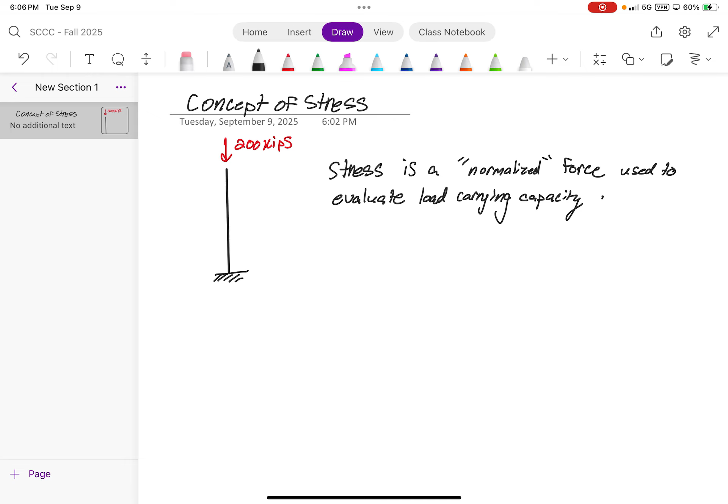We don't, right? So stress is a normalized unit of force. That's not English. And it's used to evaluate load carrying capacity of members of different sizes.

Let's take, for example, a concrete beam, or no, concrete column. What do you guys think is going to be able to handle more load? A 12-inch by 12-inch column or an 18 by 18-inch column? 18 by 18. Why? It's bigger, it's larger.

Now, you guys know how concrete is defined by a type of compressive strength, like you guys might have learned from... what is that course that Simon teaches? What? No, it's like the very beginning - construction methods. You guys learned about how concrete can have different strengths. For example, 4,000 psi concrete, 5,000 psi concrete. What does that mean?

Exactly. It's the pressure that it can handle, or the force that it can handle per unit area.

So now let me ask this. Let's say that 12-inch by 12-inch column was 8,000 psi concrete. But the 18 by 18 was 4,000 psi concrete. What can handle more load now?

That's what my small... Well, how do you know? Because we need to take more load bearing. Yeah, but the 18 by 18 has a larger area. So you need to do the math in order to determine it. But this gives us an idea.

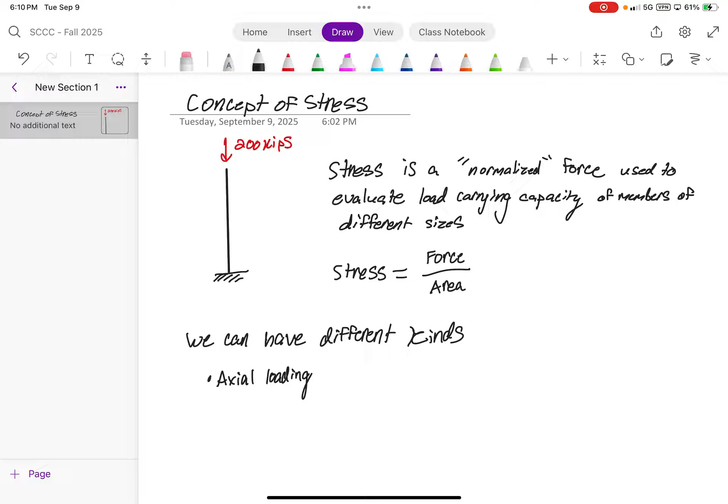So in the case of a column being loaded like this, we would call this axial loading, or axial stresses. And what this basically just refers to is simple tension and compression.

We can also have shear stresses. Who here knows what shearing is? Anyone? Anyone want to take a crack at it? Everyone's heard of the term shear, but what is it? It's sliding. Yeah, they're sliding stresses.

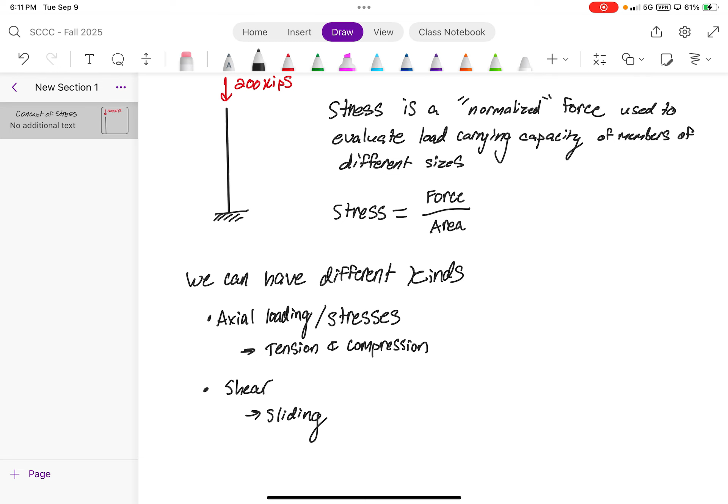We'll actually learn about shear stresses next class. We can also have bearing stresses.

What type of structure do you think might transfer bearing stresses? Girders? Yes and no, it depends on how it's ultimately connected. I'd say a perfect example of this would be footings, where there's a straight contact area in which something's pushing down on. So I'm going to put footings, for example.

We can have bending stresses. What type of structures do you think undergo bending stresses? Bridges, yeah. But bridges can take, what part of a bridge specifically though? Because bridges can take pretty much every single type of these. It's just a structure - the particular elements themselves each carry their own particular loads, which then transfer it through stresses.

So what part of the bridge might handle bending stresses? Just the road itself. Right, the road, the beams. So these would be like beams.

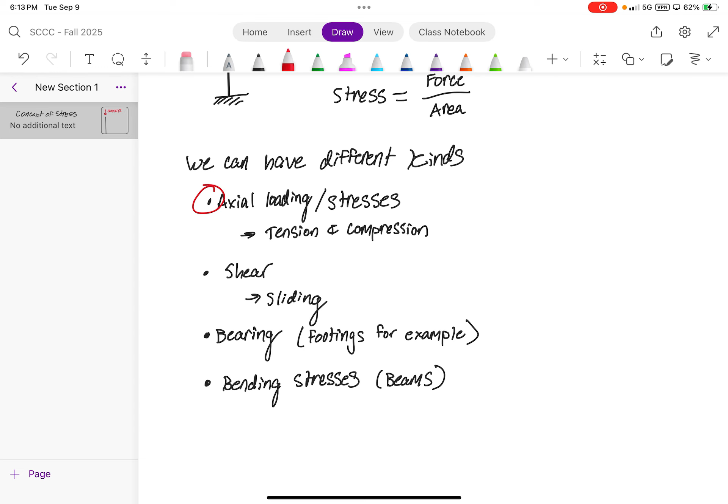So let's consider an example. Let's say we've got a beam here. But instead of it being like a beam, it's just some horizontal element, and it's subjected to some load. Somebody pick the magnitude of the force. How large do you guys want this to be? 10 kips? All right.

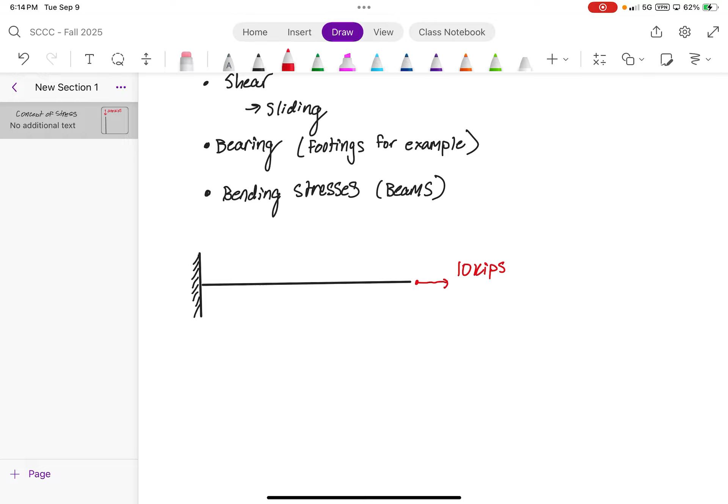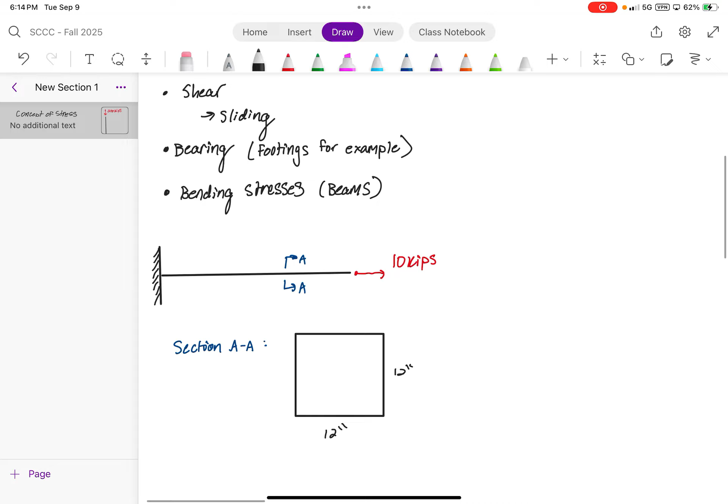Great, now let's pick some geometric properties about it. Let's say that when we look at this from a cross-sectional perspective, so looking at it from section AA, it's rectangular in cross-section, and it's 12 inches by 12 inches. All right? Now let's determine the stress.

But right before we do that, let's just define really quickly some of these variables. Stress we commonly refer to as this Greek letter - it's basically a zero with a hat. My students last semester got really creative and did not call them the appropriate names. So this term is called sigma. The force is just going to equal F, and then the area is just A.

All right, so if we wanted to calculate the stress in this member, how would we do that? We've got 10 kips, and then 144 square inches, because the area is 12 by 12, so 12 times 12 is 144. What do we get for the stress? We get 0.07, and we'll use units of KSI.

This represents some... whoops, that's way too large.

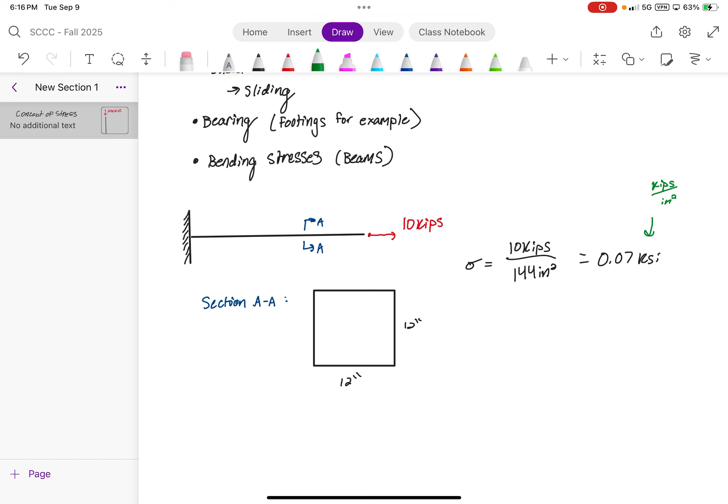Kips per inch squared. Do the units look familiar at all? KSI, we could convert this to PSI, right? How do we do that? How many pounds are in a kip? 1,000 pounds in a kip. So if we were to convert this to PSI, just multiply it by 1,000. And you would get, I did some rounding off, but the actual value would be like 69.4 PSI, which rounds up to about 70 PSI. So it's a very small stress.

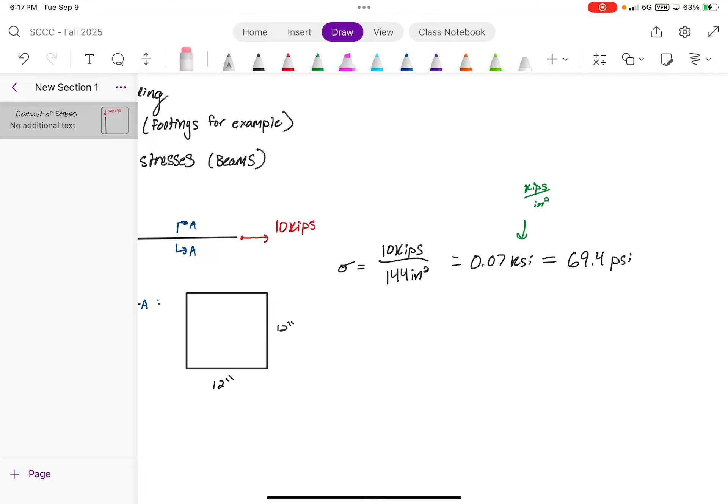We can also convert this to units of PSF. How many square feet are in a square inch? Well, here's a nice little trick. If we wanted to convert it to PSF, multiply it by 12 inches squared per foot squared. So multiply it by 12 inches per foot, and then just square the whole thing. What you'll notice is the inches will cancel out. And what we would get for stress at this point now is 10,000 pounds per square foot.

Let me increase the size of this slightly. So let me ask you this. Which stress is the correct stress? You want to take a crack at it? I guess it would be all of them, right? Yeah, exactly. They're all the same in terms of units. But this is where it's really important to pay attention to units. Because if you write down that it's 10 kips per square inch and you're designing something for 10 kips per square foot, there's going to be a big issue because you're not paying attention to your units.

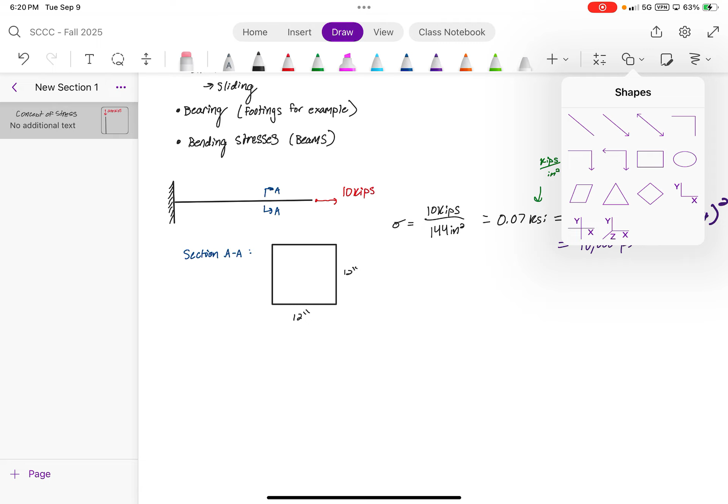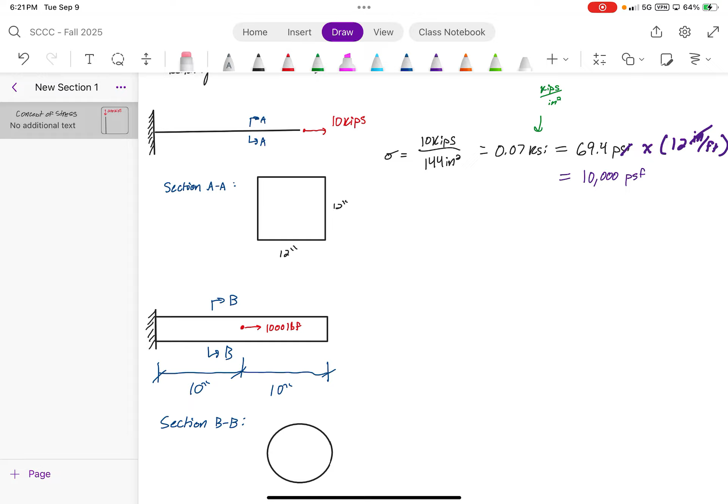All right, now let's get into this a little bit further. Let's say now we've got... I'm going to get a little artistic with my drawings. I apologize if they take me a little bit of time to draw, but I promise they'll be worth it. Let's say now we've got a member loaded right here, and let's say it's about 1,000 pounds. And it's located ten inches away. And its cross section, I'm going to use BB actually, is now just circular, and it has a diameter of, let's say, 3 inches.

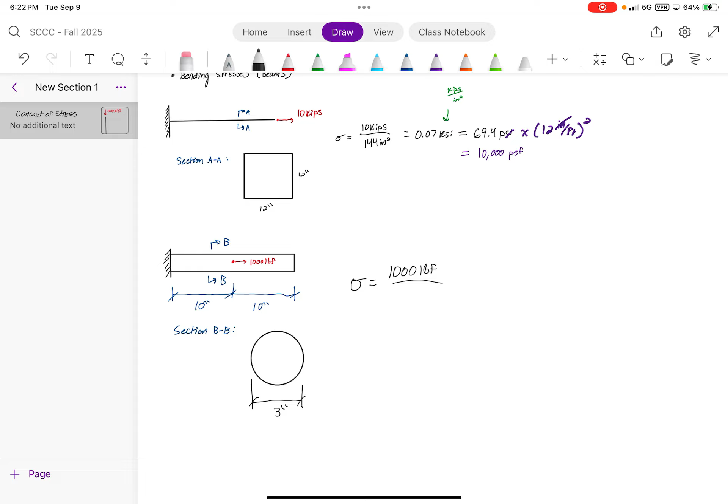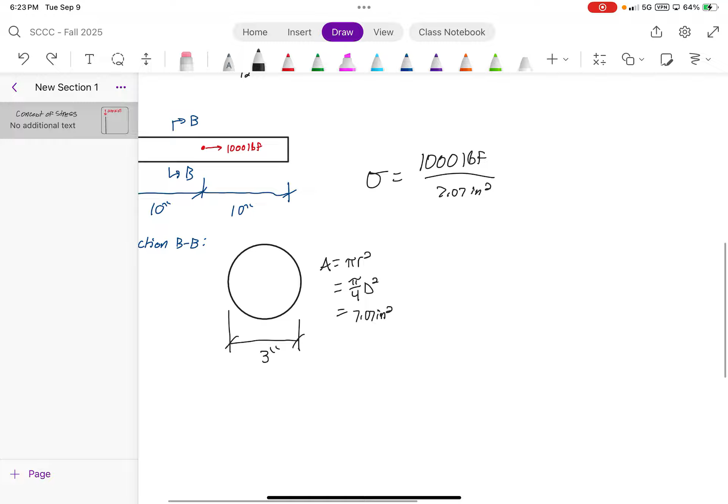What would the stress be in this case? How about you guys give it a quick crack at what the stress would be? So 1,000 pound force divided by what? What's the area going to be? What's the area of a circle? Pi r squared. You can rewrite this in terms of diameter, this is my preferred form: pi over 4 times d squared. When you calculate this, you're going to get roughly 7.07 inches squared. So when you throw this in there, you should get that the stress is equal to 141.5 psi.

Now, here's an important question. Is that entire rod stressed? Is every part of this rod going to feel this 1,000 pound force? What do you guys think? Raise your hand if you think yes. You think every part is loaded. You do. Who else? Who here says no? 1, 2, 3, 4, 5, 6. Who here doesn't give a crap?

Does anyone happen to have a rubber band by any chance? You do? Who does? Nicole has a rubber band? Do you mind if I borrow it? Oh wait, here's one right here. All right, I'm going to stand really close in the middle, so I hold both ends and I load it, right? Both sides stretch, right? Makes sense that the entire thing is fully under load, right? Now let's say I grab it at midpoint here and then I pull it. What about this part here that's a little floppy? Is that under any loading? It's unstressed. So in cases like this, it's really important to understand where loading is really occurring. So the stress is really only being felt in this region of the rod here, and everything else is just freely translating because of this deformation.

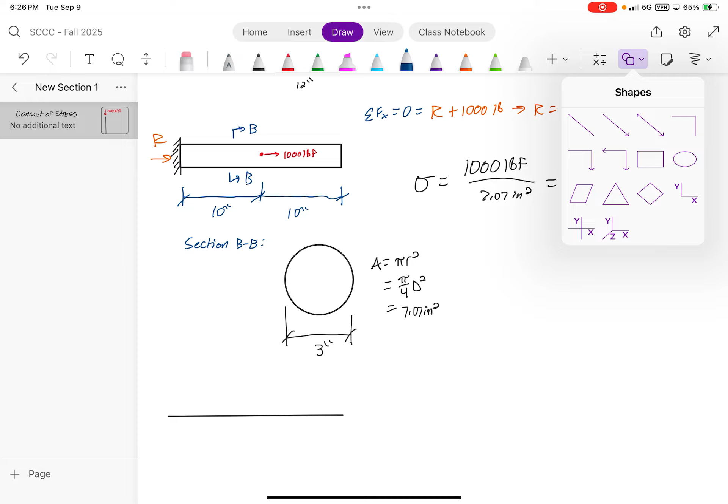Now, to get these diagrams, we need to observe how the forces look internally, because stress is dependent on what the internal forces are. Do you guys remember when you were dealing with trusses, you would do this thing called the method of sections, which you would cut into the members and analyze the forces internally? You do the same exact thing here.

So let's say we cut just an arbitrary section just right through there. Let me draw that down here.

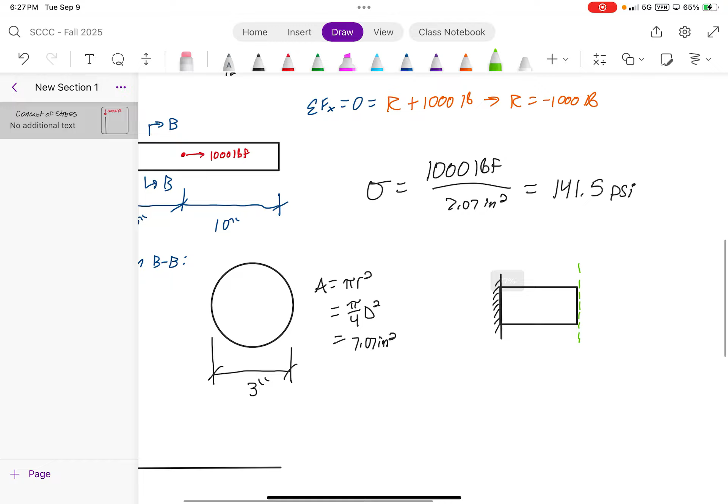And then what was the rule with method of sections? You observe everything either to the left or to the right of the section that we're interested in, right? So in this case, our section is just going to be just like that, with the green line coming down like that. Next, we draw our forces that are applied, which in this case is just going to be 1,000 pounds acting to the left. You guys see that so far?

And the last thing that we do is we replace whatever material is remaining with our internal force, which I like to use the letter N for internal forces. So that would then in turn change this to N.

So we look at forces in the x direction equals 0. And what's our equation going to be? It's going to be negative 1,000 pounds plus N. And N, you get positive 1,000 pounds.

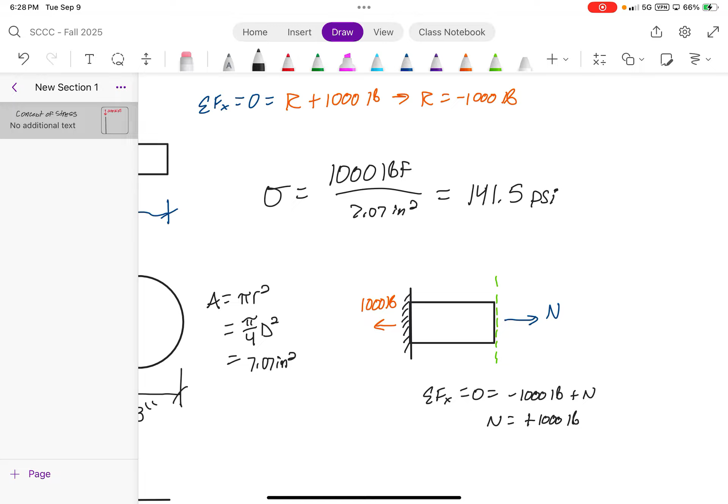What does the positive indicate within the member? What do you guys remember from method of sections for trusses? What does a positive sign indicate? Tension. So our rod is in tension, which makes sense because this load here is just pulling it out, right? Like this would get ripped right out of the wall if it was not bonded properly. You guys would agree, right?

I know it seems very easy right now, but once I throw 4 or 5 loads of different magnitudes, this thing gets complicated really quickly. And then you can't tell what part of what rod is under compression, which one's under tension. Which is why I'm telling you, just cut sections whenever you can, because it helps big time with understanding what the internal forces in each part of the rod are.

Now, just for clarity's sake, let's cut a blue section right there. What our shape is going to then look like is it's just going to be a little bit longer. Our force is going to be 1,000 pounds. Let's draw the blue here.

And then we include everything either to the left or to the right of the section. So in this case, we're going to have this 1,000 pound force added back. And then of course, we always add N.

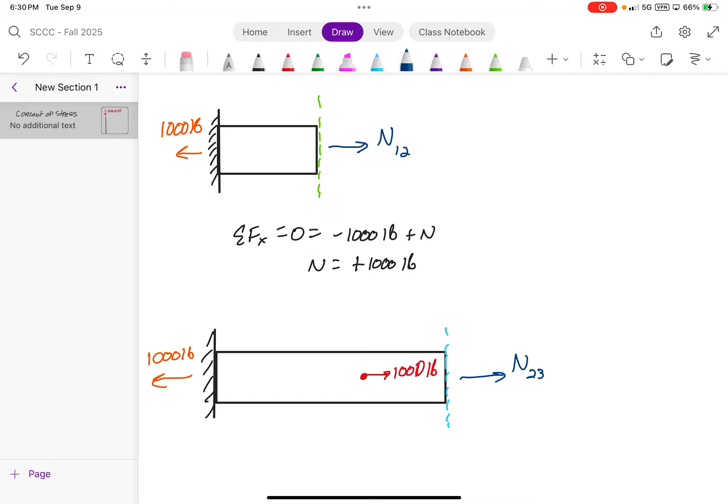What is N23 going to be?

All right, let's see if I can remember people's names. I know you're Michael, right? You're Grace? No, what's your name? Olivia? Yes, Olivia. There's not even a Grace in this class. You're Nicole. I cheated a little bit because somebody said your name. What's your name? Ella. I don't think you were here last class, right? What's your name? Alejandro. You're Michael, I just said that. I cannot remember your name, I'm so sorry. What is it? Emily. I'm really bad with names, so I'm sorry. What's your name? Tom, or Thomas? Your name? Joe? No, Christian. Isaac. What is it? Isaac. And then Edgar. All right.

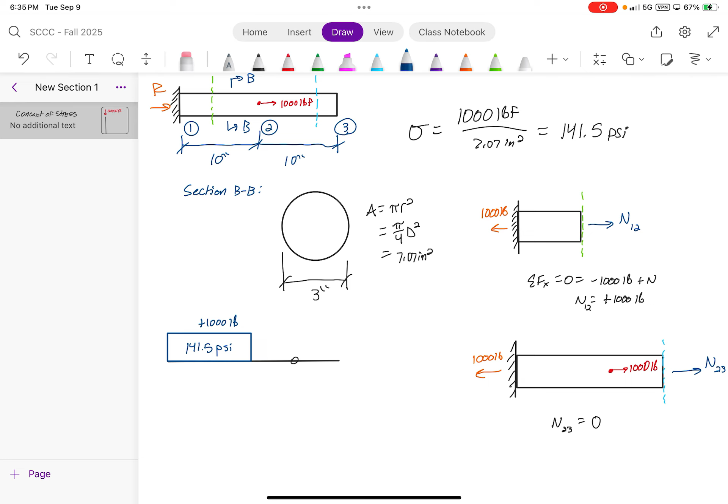And then this in turn, once you divide it by the area, would be 141.5 psi. You guys agree? How'd you figure out 141.5? That comes from the stress that we computed up here.

And so then, of course, this stress here, this force is not exactly the 1,000-pound force applied, but it's actually the internal force. So always use the internal force, because once you start seeing like 5 or 6 loads, then the stresses are dependent on how each load independently is affecting that section of material. Make sense?

All right. I got a nice fun one now.

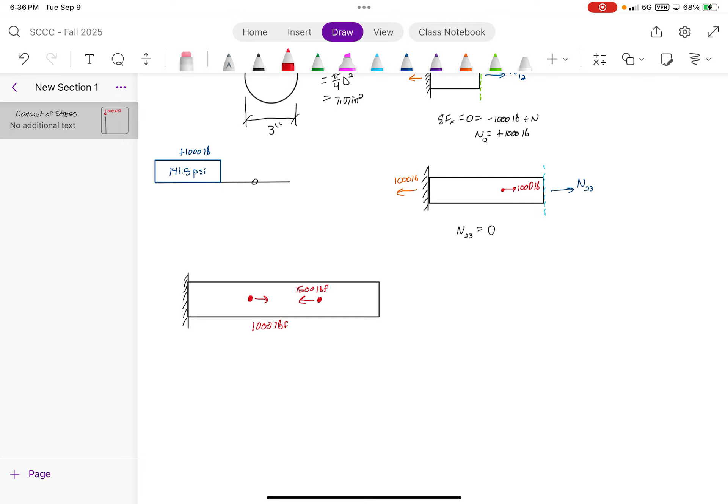Let's say now I've got a rod here. A 1,000-pound force - that's still 1,000 pounds, don't worry, I'm just... a 1,500-pound force, and then a 500-pound force.

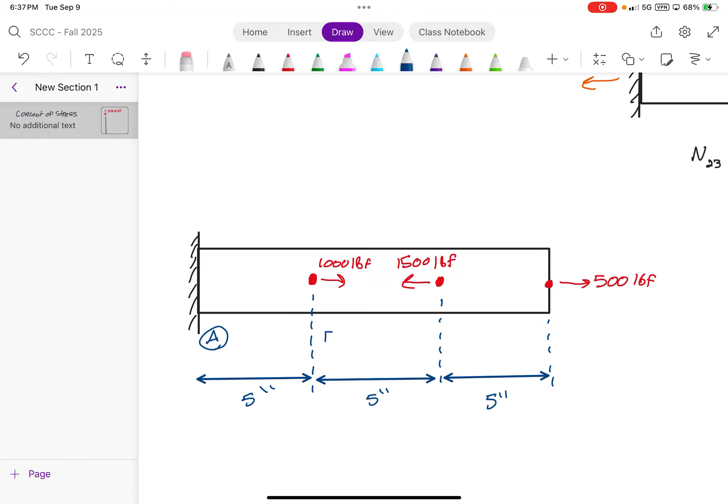And let's say that the location of each of these is just a third of the total length. So this will be like 5 inches, 5 inches, 5 inches. We'll call this point A, point B, point C, and point D. And what we want to determine is the stresses in AB, BC, CD. You guys agree there's 3 separate parts of this bar, right?

How do you guys think we would determine the stresses? Or the forces, better yet. The first step we would always take is just determine external equilibrium. This is your sum of the forces, sum of the moments. It's your statics.

So what we're going to have now is our reaction force, RA. And what would the sum of the forces in the x direction equal? Let's say we want to determine RA. What would that be?

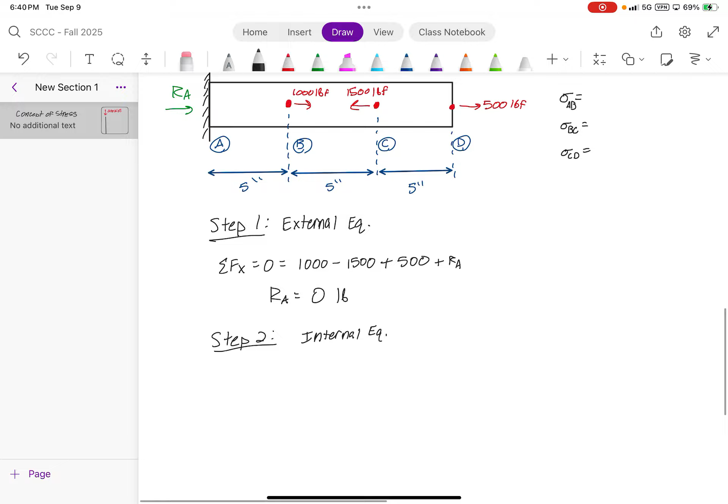All right. Step 2, now we look at internal equilibrium. And this is the step where you start cutting into sections. So how many sections are we going to want to cut here?

3. My recommendation is just always cut them right down the middle of each. So we're going to have section 1, section 2, and section 3. Always including everything to either the left or to the right of said section. So looking at section 1, what are we going to have?

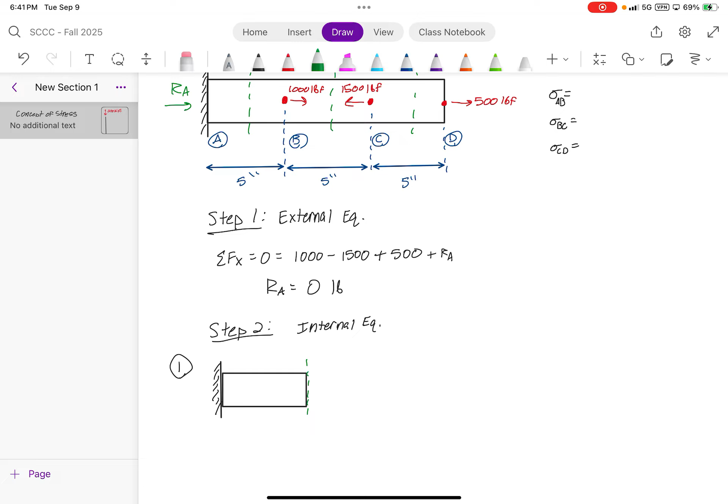It's just going to be this rectangular section right here. And then we would generally draw RA, but we know that that's 0. And we're going to have our internal force NAB this time, because of the points it's between, NAB. You can also, if you wanted to, say it's N1. Doesn't matter. You could say it's either the stress between the points A and B, or the stress at section cut 1. Doesn't really matter too much how you call it, just as long as it's correct.

So, what's the stress in that region of rod? Or the force?

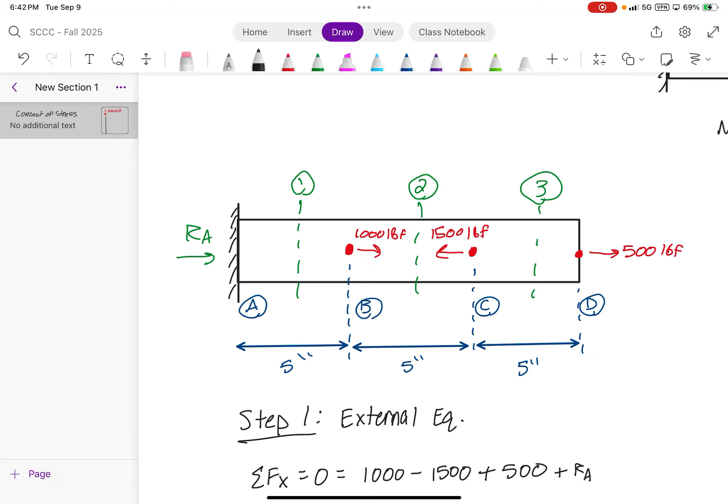So, simply put, the force in member AB, or part AB, is just 0.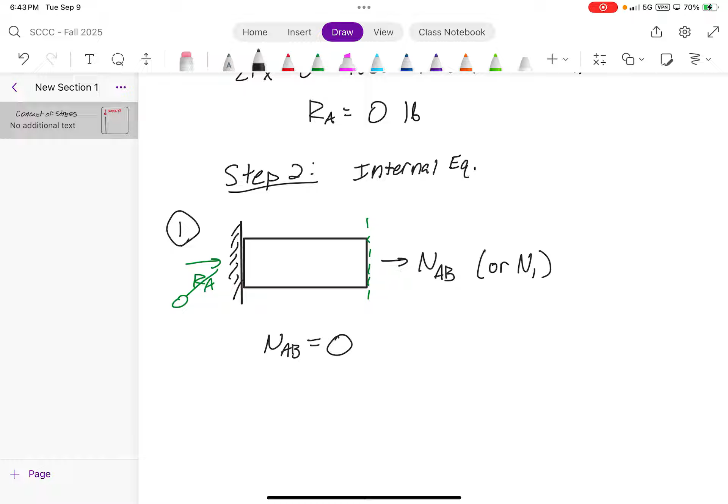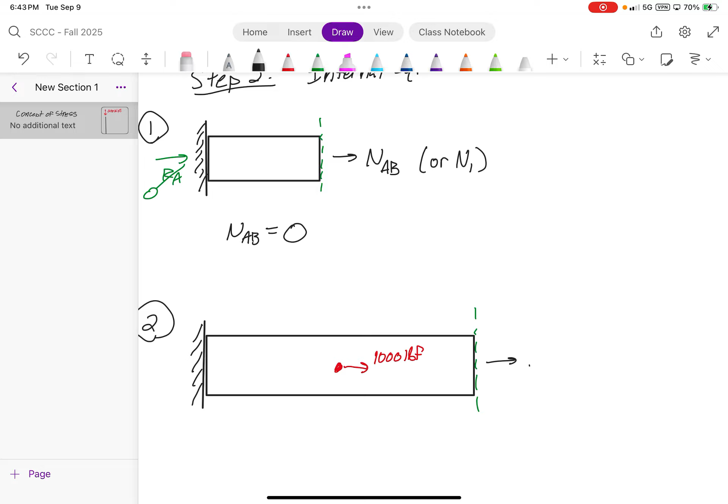Let's look at section 2 now. Our force here is going to be a 1,000-pound force moving to the right. And now we draw NBC, or N2.

What's that tell us about member BC? Keep in mind, you guys notice the direction that I'm drawing the forces? It's always away from the cut section, indicating it's assuming tension. So we're assuming that the internal force here is in tension. How do we determine its magnitude?

What do you guys think, Emily? It would be, if sum of F in x equals 0. Yeah, just apply your statics, it's internal this time. So you do sum of the forces in the x direction, set that equal to 0. And what's that equation going to look like?

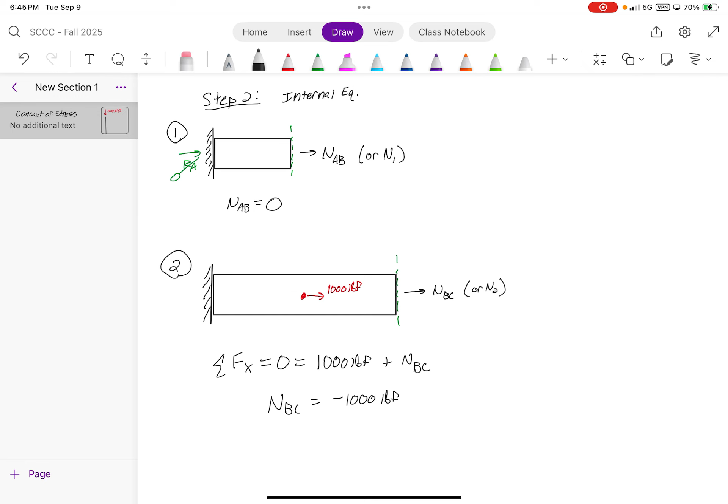1,000 plus NBC - so we've got a 1,000-pound force plus NBC. And what's NBC going to be? Negative 1,000. What does the negative sign indicate? Compression. Who said tension? Oh, I did. Okay, so it's a 1,000-pound force in compression.

Last step, look at section cut 3. It's kind of long, I know. And then our internal force NCD, or N3 - that should be an arrow.

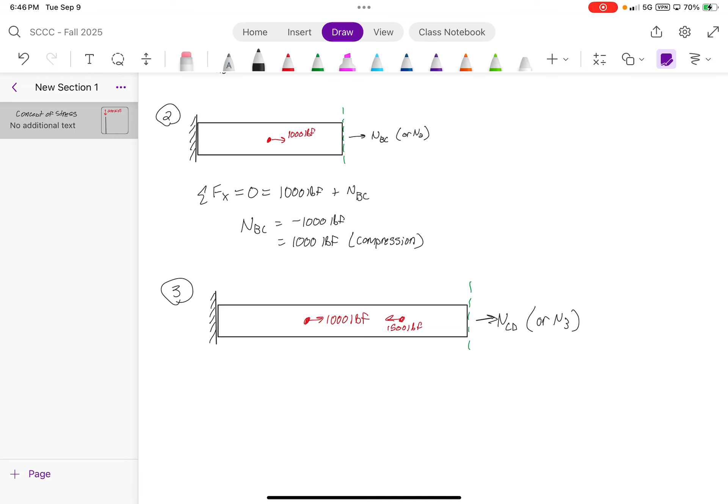What's NCD going to be now? Michael - so you would do, wouldn't we just do the same thing as the last one? Yeah, which is the sum of force in x? What's that equation going to look like? It would be 1,000 plus negative 1,500 plus NCD. What do we get for NCD?

Did you say negative 500? No, it's positive 500. Carry the 500 over. That's going to be in tension.

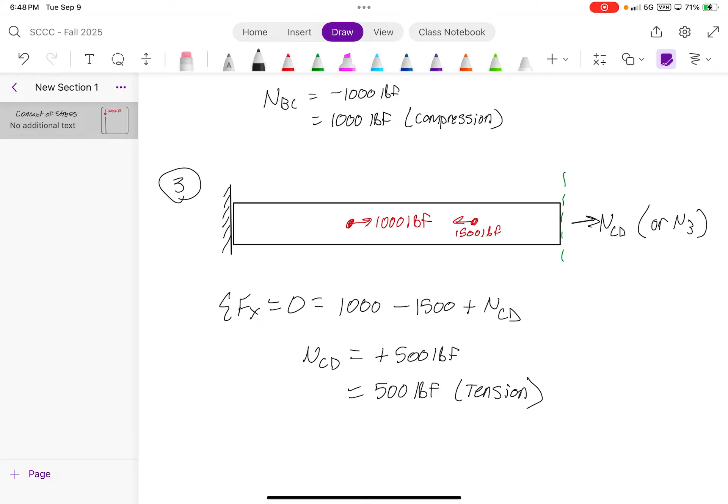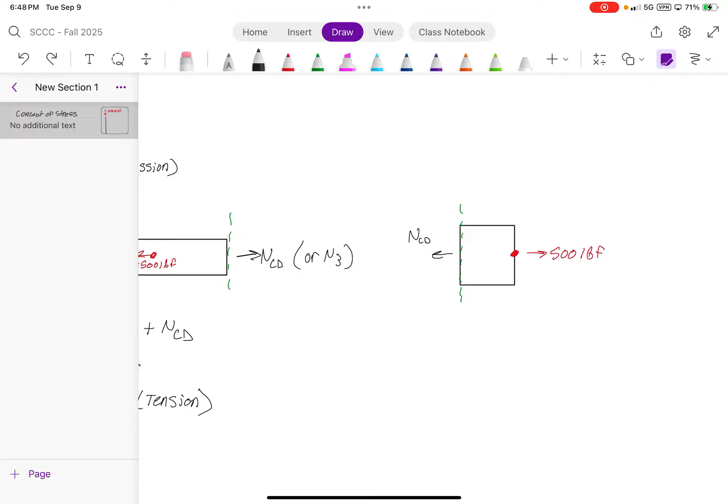Another way you could have done this is to look at the section from the exact opposite way - I'll show an example. Here it would be a 500-pound force, our section here, and the internal force again assuming tension. What you find from forces in the x direction is negative NCD plus 500. NCD is 500 pounds in tension. So you see that as long as you're doing your steps correctly, it doesn't matter which side you take the section from - as long as everything up to this point is correct, your math should work out. 500 pounds and 500 pounds, they should match.

Make sense so far? Sweet.

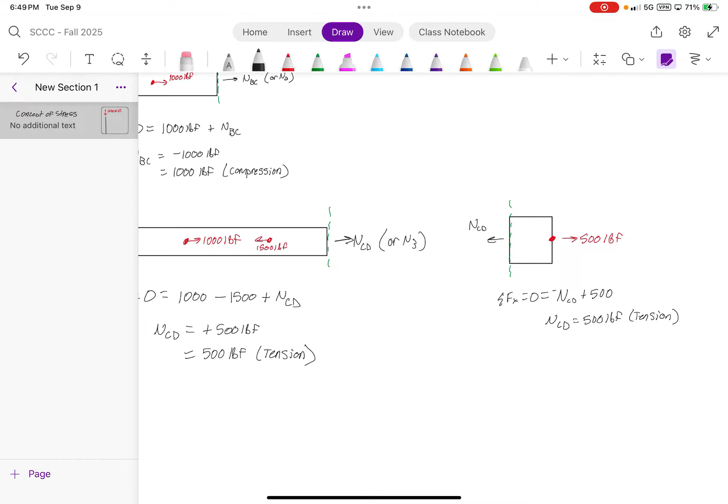So now we go over to draw our internal force diagrams. I'm just going to mark this out really quickly - we've got point A, point B, point C, and then point D. What is the magnitude of the force in member AB? 0, so we could just put a little 0 right there.

What about the magnitude of the force in member BC? 1,000 - compression or tension? Compression. So make sure you add a little negative sign. I usually like drawing it in red.

And then CD is what? Positive 500 in tension, right? So you just draw that little diagram here - I'm trying to do it to scale. Positive 500-pound force. And that's how that member is really loaded.

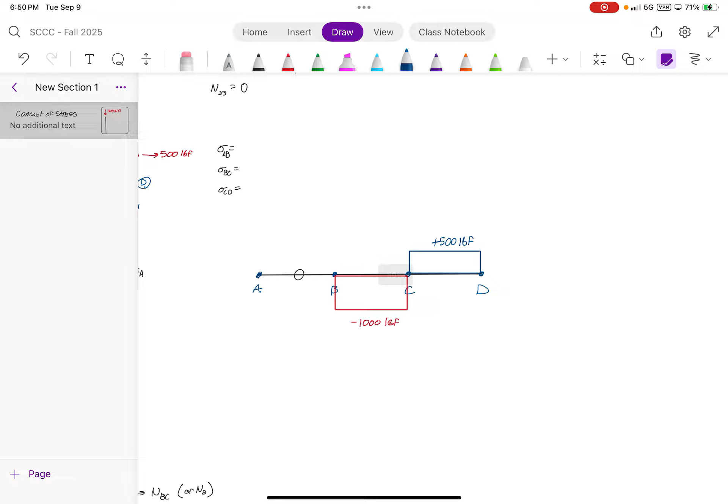You notice there's a 1,500-pound applied force, but really with the contribution of all the forces, we only need to really design for an internal force of 1,000 pounds.

Now you understand how the loads kind of transfer down in a building, right? The columns can actually be a lot smaller towards the top of the building because there's a lot less load. So instead of it being left and right, you're stacking downward force by downward force by downward force. And you can draw these diagrams for buildings accordingly. Make sense? Sweet.

All right, let's complicate things even more now. Let's say - let me actually ask this.

Does anyone have any questions so far about anything that I just covered? Nobody? No questions at all? I just want to make sure everyone's fully understanding it before I start throwing more stuff at it. All good? Cool, coolio.

Let's say now we have a rod, but it's a stepped rod. And we apply this force here, about 10 kips.

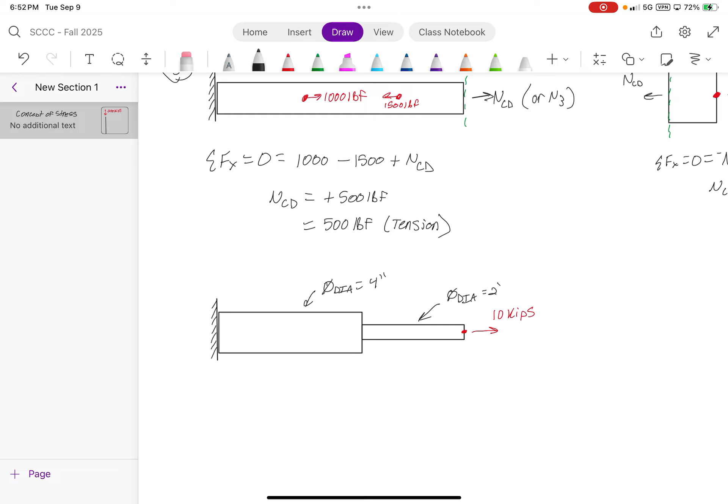Now let's say that this is a circular shaft with a diameter of around 4 inches, and then this is a shaft with a diameter of, let's say, 2 inches. I'll give you the lengths too: this is 10 inches, and this is 8 inches.

I just realized I never even gave you geometric properties for the previous problem, but that's fine. It's the same steps - you would just take each independent force and divide it by the area.

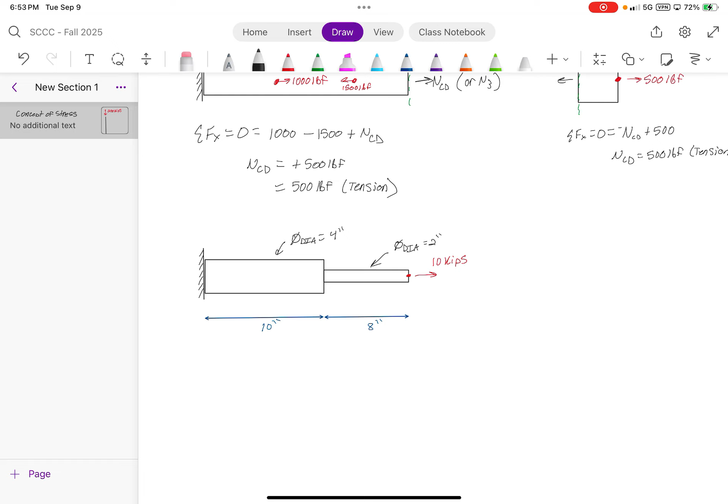Let's say we wanted to determine the stresses now for AB and BC. So that's AB and BC.

What's step 1 of this problem? Exactly. Step 1 is just external equilibrium.

What do we get for the reaction at A? You do sum of the forces in the x direction. We get RA plus 10 kips, indicating that RA is equal to negative 10 kips, or just 10 kips moving to the left.

Now, what's the internal force in member AB? Quick question - it's negative 10? You draw it assuming it's always moving to the right, and then mathematically, since this is moving to the right, this has to move to the left. So you get RA plus 10, this becomes negative 10, and the negative sign just indicates that the assumption you made about the direction is incorrect.

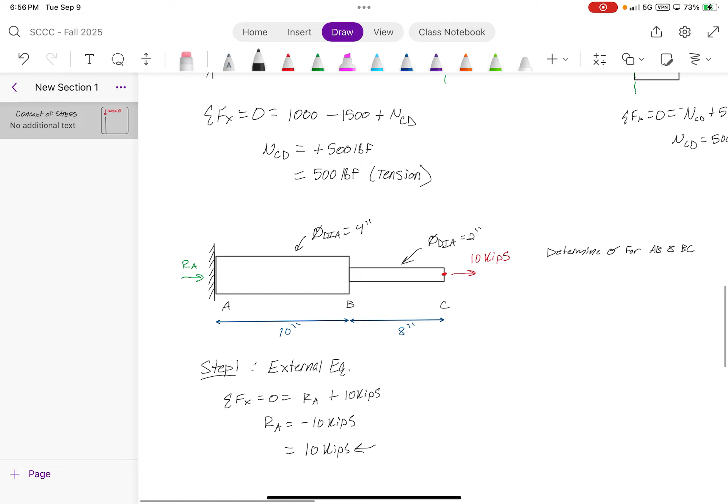So just from observation, when you go to step 2 and conduct internal equilibrium, you can just say all internal forces equal 10 kips. Now, that 10 kips - is that a tension or a compression force? Compression? Tension. It's a tension force. So it's 10 kips in tension.

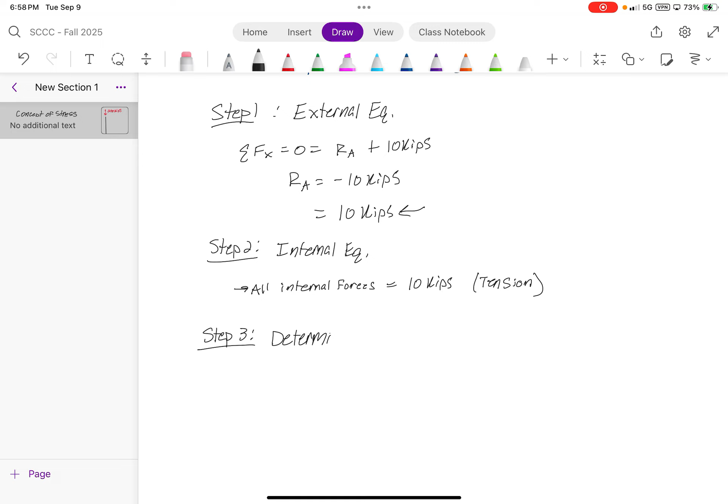Now, step 3 of the problem - we didn't do it for the previous problem, but we're going to do it for this one. Determine stresses. So we're going to have one for AB and one for BC.

What do we need to compute the stress? Remember our stress equation. I want somebody back here. But Michael, you get to pick one of the 3 back here. Please announce your name again. You're Joe, Christian, and Irving - what is it? Irving. So you get 3 options: Joe, Christian, or Irving. You get to ruin one of their afternoons or evenings. I'll just do Christian.

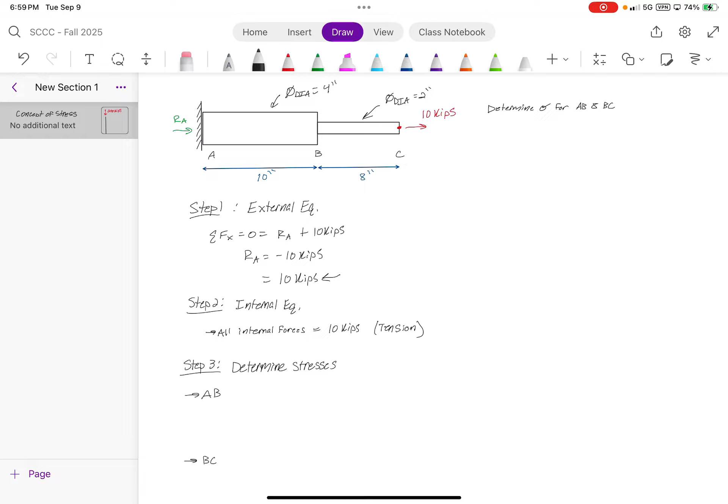What do we need to determine the stresses? Stress equation. And what does the stress equation tell us? Stress equals force over area. We have the force, so what else do we need? We need the area. How do we determine the area here? What are we given? Diameter. And what's the equation for using a diameter? The diameter indicates it's a circle, so what's the equation? Pi over 4 times d squared. Exactly.

So the area here is pi over 4 times the diameter, which is going to be 4 inches squared, which gives us an area of around 12.57 square inches.

Let's do it really quickly for BC. And the area is 3.14 inches squared.

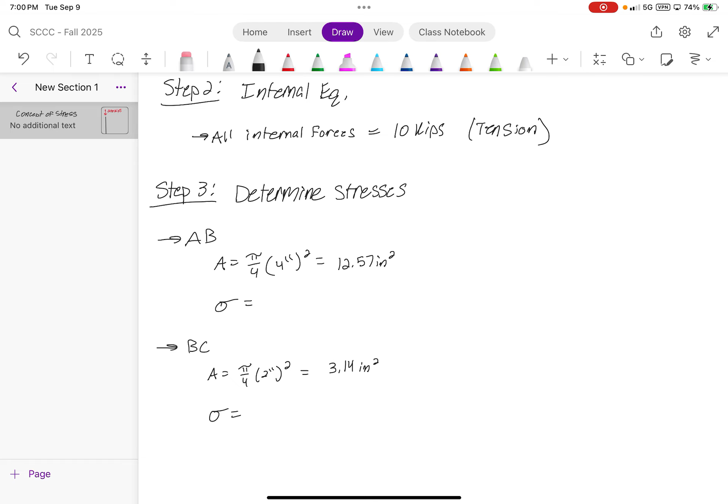The stress is just going to be 10 kips divided by 12.57 inches squared, and that gives us roughly 0.80 KSI. For the other shape, it's going to be 3.18 KSI, give or take.

What do you guys notice about the stresses? 3.18 and 0.80. How does that make sense? This is only twice the diameter, but the stress is 4 times the size.

What do you guys think? Is there a moment on it from RA? No moment, we didn't take any moments. What did you say? Say it. The value - yeah, but what about the value specifically?

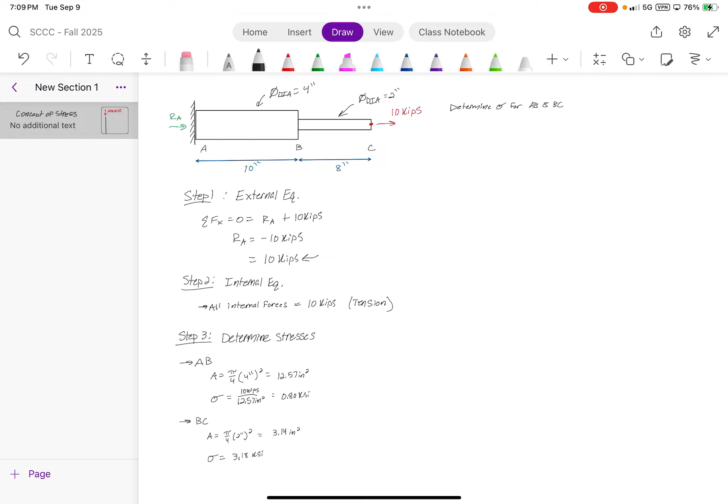Make sense? And for number 4, do you want us to find the inertia also? That's the centroid question, I believe so. What did the question say on the homework? Let me go back and look it up.

SCCC, semesters, fall 2025. Let me not pull up the solutions. Oh, that's homework 2. That's next.

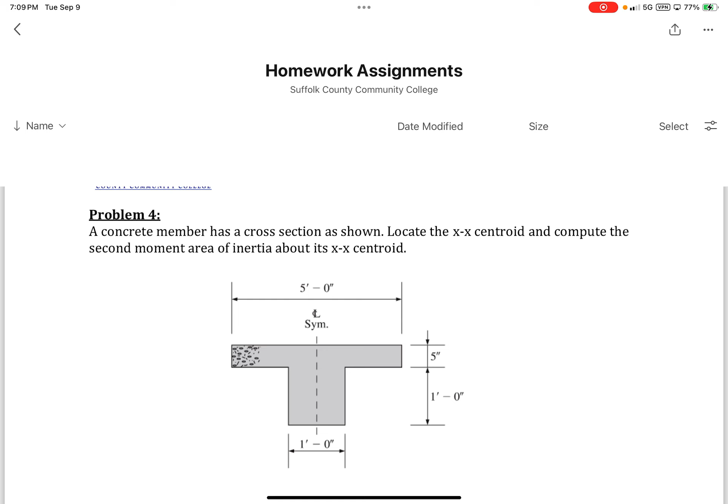Locate the XX centroid and compute the second moment of area, the I value. Is that I of X? Yeah, I specify the XX centroid, which is going to be wherever the neutral axis is. Where is this? Let me just check this really quickly.

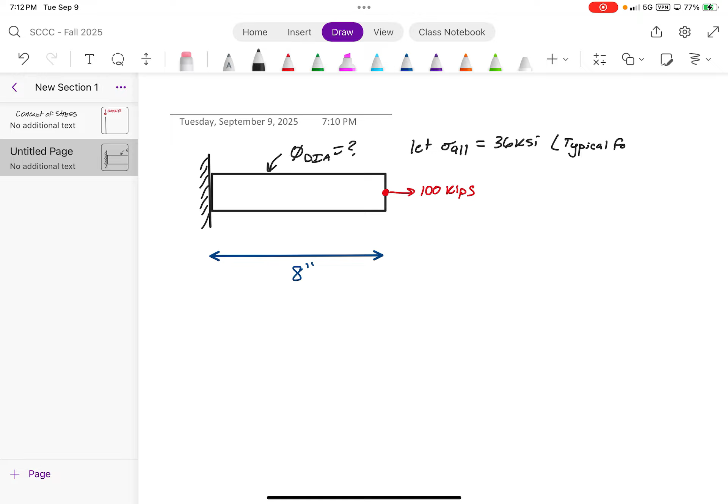I'll give you guys a little bit of a fun problem. I'm going to teach you guys a little bit about how to design stuff now. Since we learned how to analyze internal forces, we understand the concept of stresses, hopefully, right?

So this problem I'm giving you guys now, I give you guys an allowable stress of 36 kips per square inch. What this means is that it's a material property. This is a new concept to you guys also. 36 KSI, for your knowledge, is the typical yield strength, we call it, we'll get into it later on, for A36 steel, which is a type of steel that is heavily used in the construction industry. A lot of steel members, like steel channels, steel angles, are made from A36 steel, and its allowable stress is 36 KSI. So my question to you guys is, what is the diameter that we would need in order for it to not fail?

Let's round it to the nearest 16th of an inch, right? Because if you went to a fabricator and said, I need a steel member with a circular diameter of 2.84193678 inches, the contractor would more than likely smack you over the head with that steel member. Round it up.

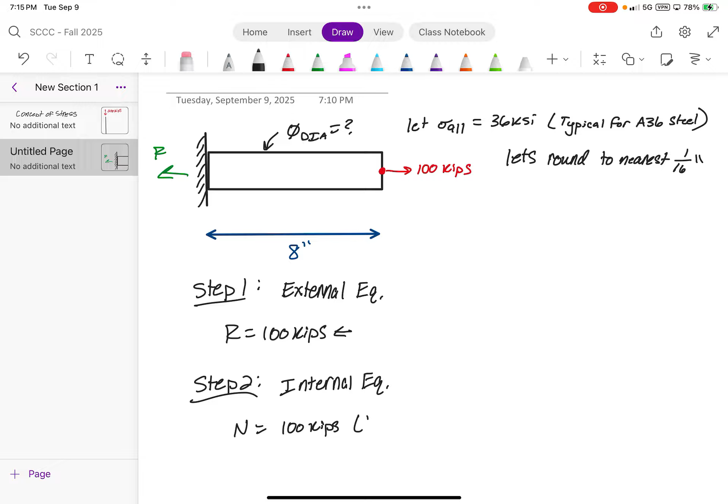What's step two? Internal equilibrium. Simply put, the entire force N is just going to be 100 kips. And if you look closely enough, you'll notice it's going to be in tension. I made the loading very simple so that way we could just skip straight over to the design.

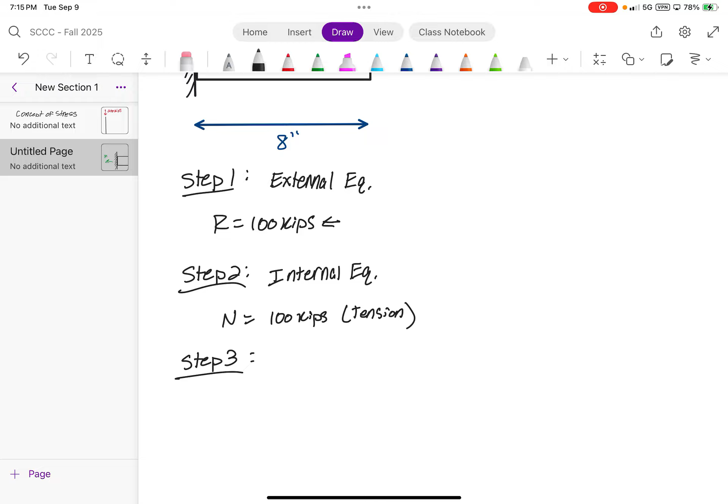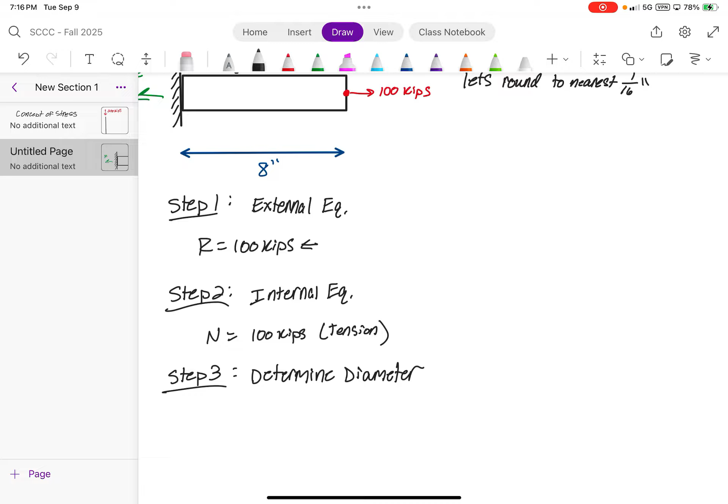Step three, what was step three? Determine the stresses. But what's the issue? We need the diameter, which we don't have. Yeah, we're figuring out what the diameter is. So we got to do a little bit of manipulation. So step three in this case, instead of determining stresses, let's say determine the diameter. So it's really determine whatever thing you need to solve for stress problems.

So in this case, our equation for stress is equal to what? What was stress equal to? Force over area, N over A. What two things do we know? We know the allowable stress of the material, so it could be safe to assume that we can just add the 'allow' here and say the stress is 36 KSI. What else do we know? Yeah, we know the internal force. So we can just rewrite this entire expression to find the area.

Which, when you cross multiply, it's just going to be the internal force divided by the allowable stress. So take that 100 kips, divide it by 36 kips per square inch, or KSI. What we notice is the kips will cancel, and then what you're left with is 1 over inches squared. If you remember from your math classes in high school, when you have a fraction of a fraction, just take this denominator and throw it up on top. So our units will be in inches squared. So our area becomes 2.78 inches squared.

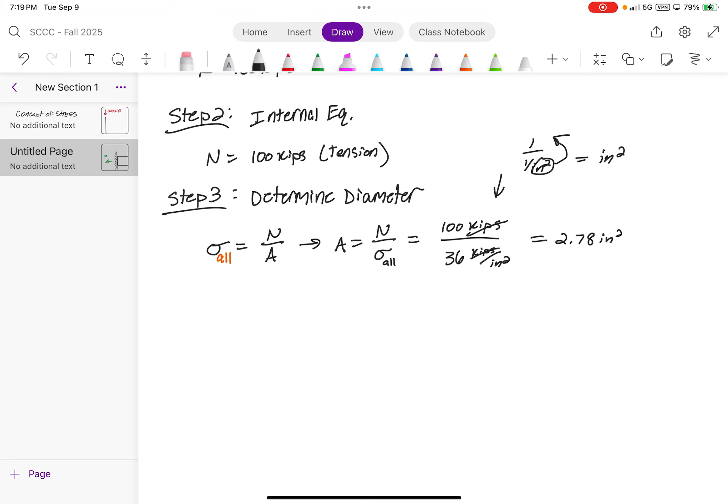Let's break this down a bit more. Multiply both sides by 4 over pi. The pi over 4s will cancel with the 4 over pi, so what we're left with is d squared equals 2.78 times 4 over pi. Now we take the square root of both sides, and what we get is d equals the square root of 4 times the area divided by pi.

4 times 2... what do we get for the diameter? We get 1.881 inches.

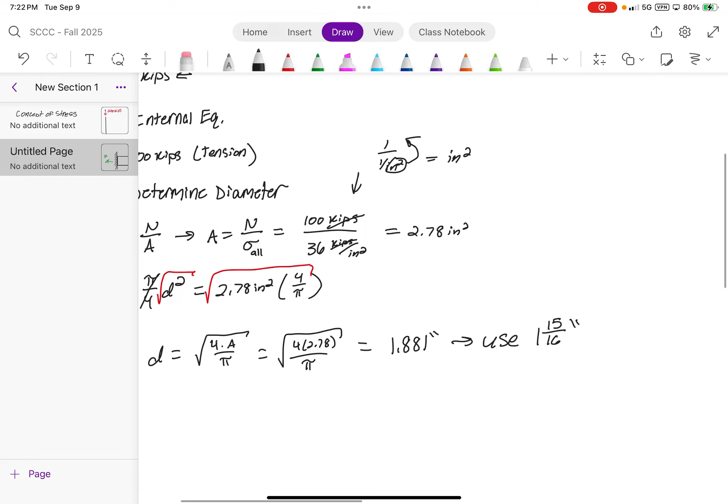Does it make sense why we go up instead of down? So the nearest 16th of an inch value is 1 7/8, which in decimal units is 1.875. However, 1.875 is too small because we need at least 1.881. So you add an additional 16th of an inch to that 1 7/8, and what you get is 1 15/16.

Now in practice, the contractor would throw the 1 15/16 inch bolt back at you, saying just use a 2-inch diameter bolt - it's a lot easier. So in practical uses, just round up to a 2-inch bolt. Any questions about that? No? Cool.

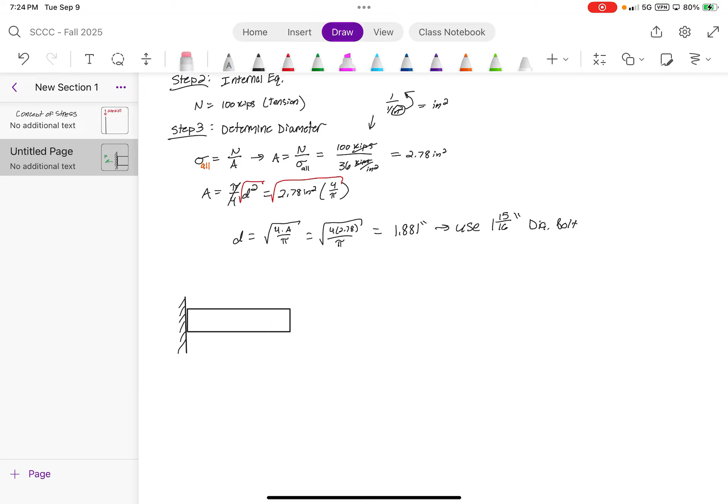Let's now consider another problem. Say this has an unknown diameter, and this is rectangular with unknown dimensions of B. Let's say this force is 10 kips, and this here is 5 kips, with dimensions of 8 inches and 8 inches. This material has an allowable stress of 50 KSI, and we'll say this is a typical stress, so all the material is the same in this problem.

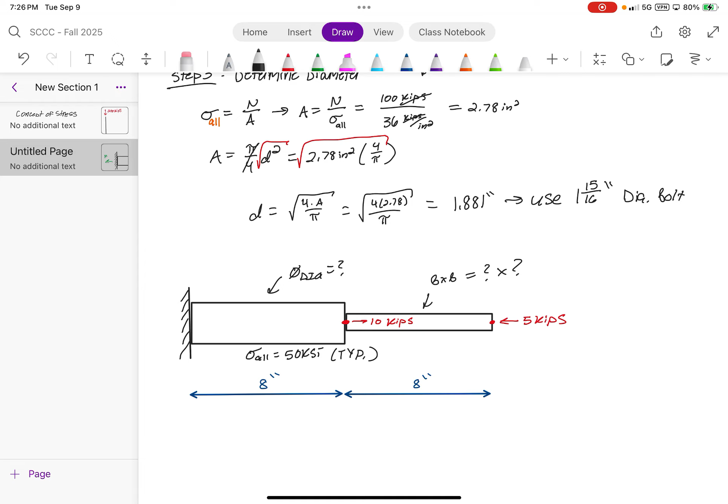Remember your steps - I'm going to keep drilling these steps into your skulls until you're repeating them like Professor Dawson's 'clear as mud' expression. Does he still say that? Yeah, he does. I hate that expression but I love it at the same time, because he used to always look at me and say 'clear as mud?' and I'd just look at him in confusion, like I got no clue what you're talking about. Yeah, when I took his first statics course, the non-engineering one, I failed that - I was not good at statics. So I always thought he was targeting me when he said clear as mud.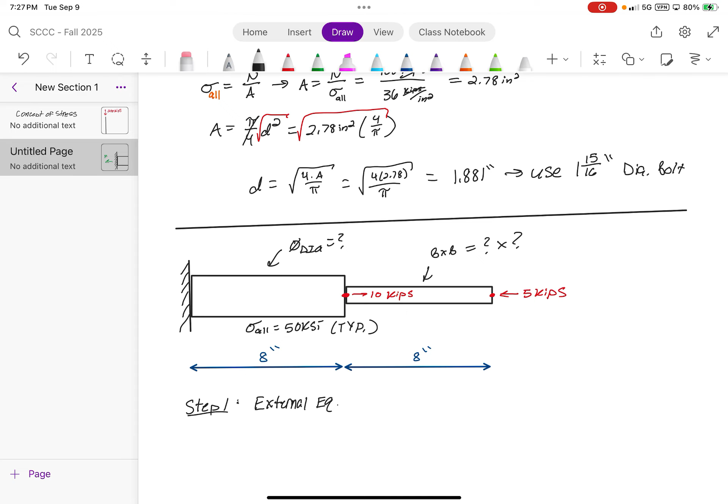All right, so step 1 - hopefully you guys know the drill by now. What's step 1? External equilibrium. All right, our reaction force is going to be right over here, and let's label A, B, and C. So this is going to be AX. Let's do sum of the forces in the x direction. What's our equation going to be?

AX plus 5 kips... let me zoom in a bit, might help... plus 10 minus 5 kips. What do we get for AX? Somebody tell me that - I'm too lazy to throw it into my calculator.

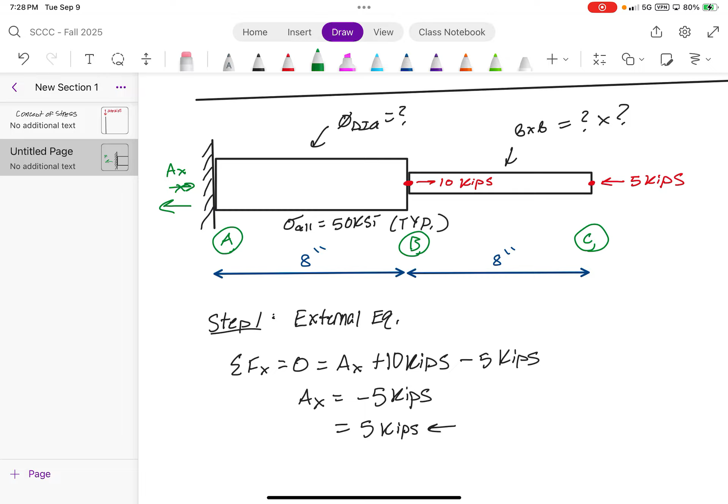Negative 5 kips, meaning it's 5 kips moving to the left. Let me erase that really quickly and just redraw it.

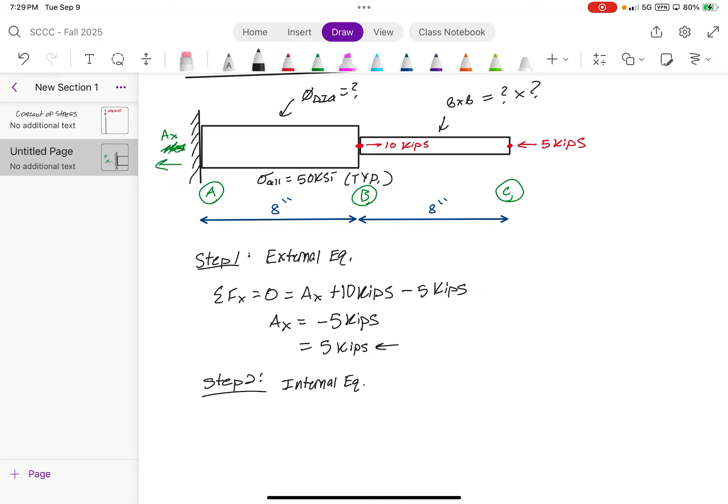Step 2, internal equilibrium. How many internal forces are we going to have? It's 2, right? We're going to have an internal force AB and an internal force BC.

Let's look at AB really quickly. We've got AB, we've got our internal force NAB, and then we've got our reaction force of 5 kips.

From observation, what do we get NAB equal to? Not negative, it's positive. Let's do sum of the forces in the x direction. We get negative 5 kips plus NAB, so you carry the negative 5 over and you get positive 5 kips. What does the positive indicate? Tension.

Am I going too fast, by the way, or am I going good? Sweet.

Let's do BC now. Darn math assistant, I don't need assistance with my math. My math is suck.

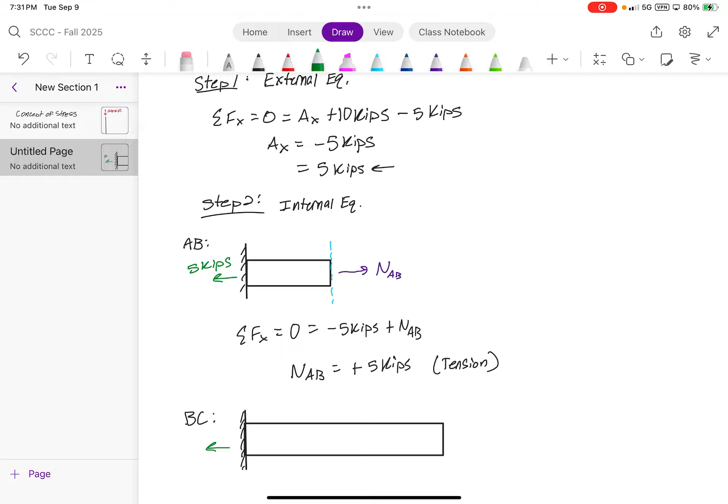We've got 5 kips going to the left, reaction force, and now 10 kips going to the right. But I drew this really poorly, so let me try and capture this in as good detail as possible. So we've got 10 kips, and then our reaction, internal reaction, NBC.

Let's do sum of the forces in the x direction. What's that gonna look like? Negative 5 plus 10 plus NBC. What do we get NBC equal to? Negative 5 kips. What does the negative indicate? Compression.

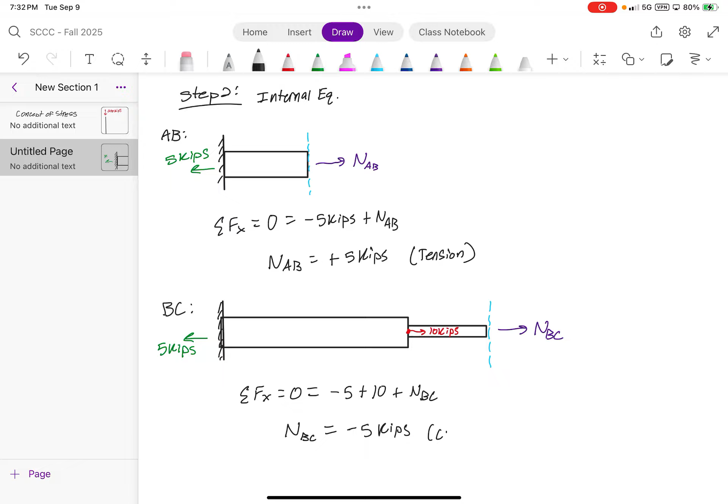So instead of just drawing the diagram, I'll just put NAB is equal to positive 5 kips, NBC is equal to -5 kips, and let's just box that for now.

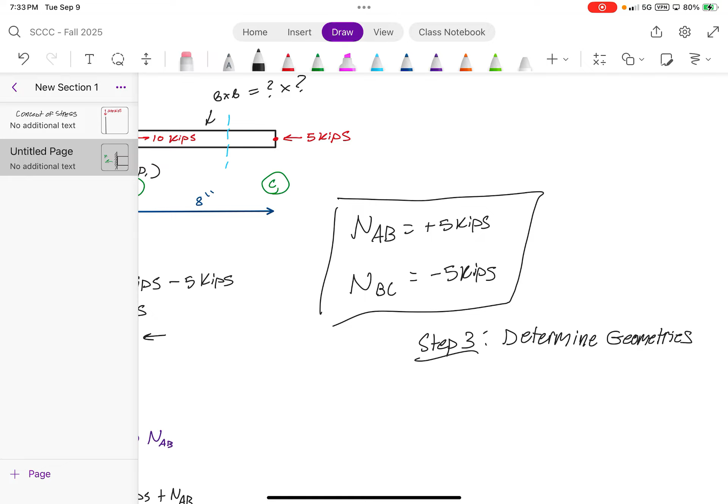Now let's go over to step 3. What's step 3 gonna be? Determine the diameter. Determine geometric properties, because if you guys pay close attention to BC, it's not a circle. Determine geometries.

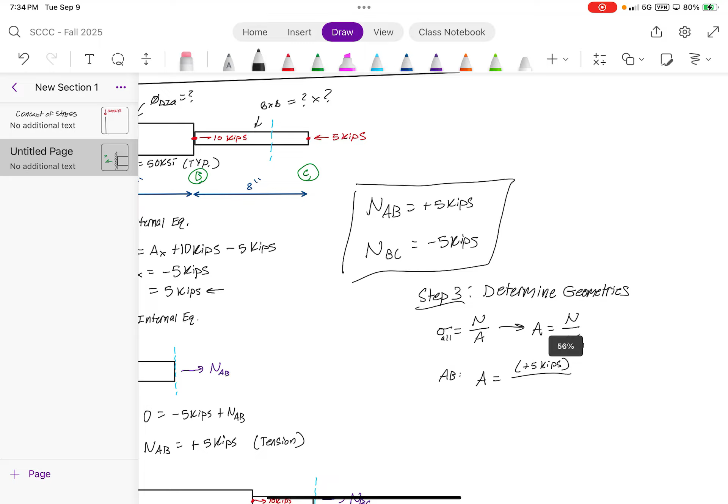Remember our equation, sigma is equal to N over A. We can rewrite this to say that the area is equal to force over the allowable stress. Looking at AB, the area is going to be the internal force, which is our +5 kips, and then the allowable stress was 50 kips per square inch, which gives 0.1 inches squared.

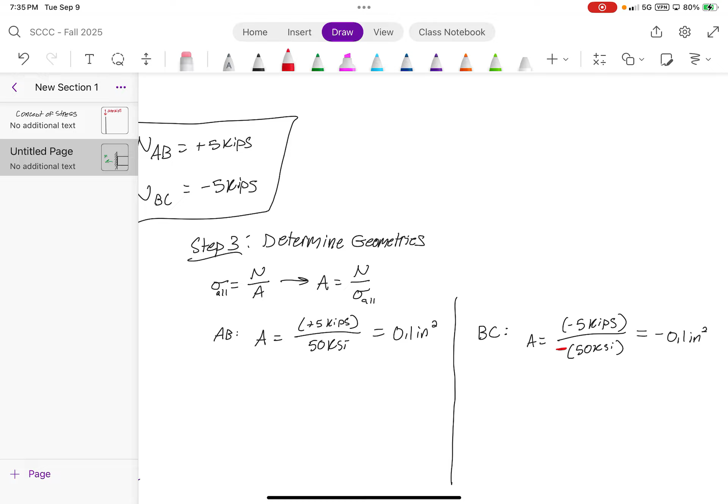We look at BC, and our area we compute is going to be -5 kips divided by 50 KSI, and what you get is technically 0.1 inches squared, but negative. Can we have a negative area? No. So for allowable stress, we usually just put a negative sign because the stress doesn't matter if it's tension or compression, it can handle the same value. It's just going to be on the opposite side of the loading, so it can handle 50 kips per square inch of negative compression. The negatives cancel, giving you the area you're looking for. So whenever you get an area with a negative value, chances are just remove the negative sign.

Make sense? All right. So we know that we need at least an area of 0.1 inches squared for both elements. So for AB, how would we determine what diameter we'd need to get that area?

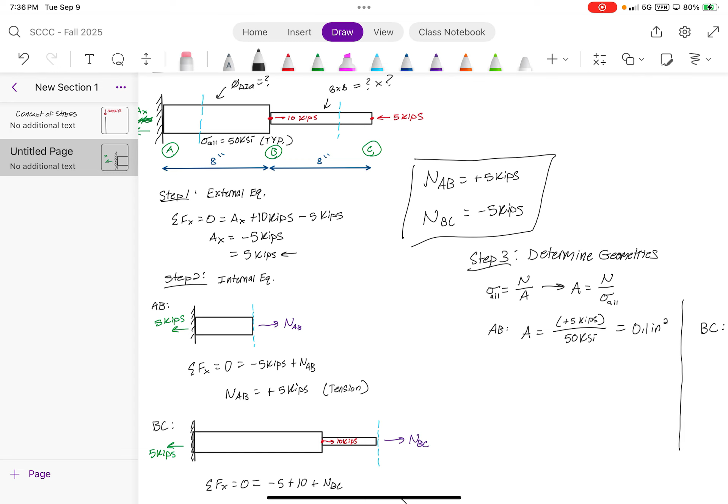How would we do that? Actually, you guys try it by yourselves, I want to see what you guys come up with, and then I'll cross compare. Once you got something, just raise your hand.

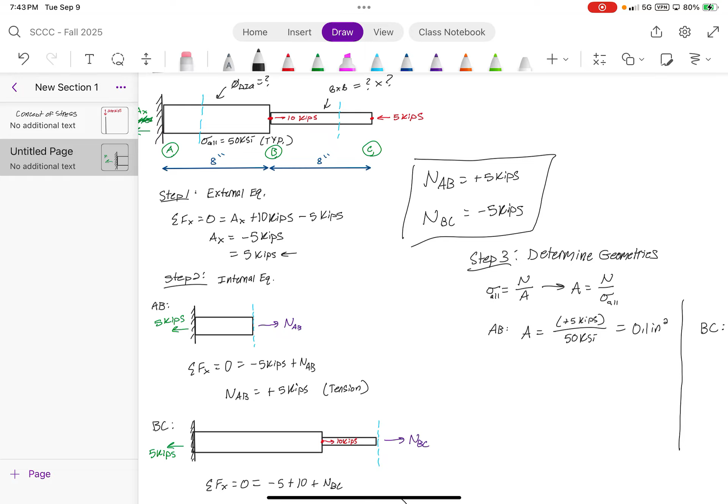Alright, let's do this real quick, and then I'll give you guys what I like to call get out of jail. It's basically just two problems that I'm going to be asking you guys to solve. They don't count towards anything, but I take them home, I review them, and then I just comment about some stuff that you guys did wrong. So it just helps me assess whether you guys are learning the material or not.

Alright, so area of a circle. Let's do the circle first, AB. The area of the circle is pi over 4 d squared. We saw in the previous problem we could rewrite this to just be d equals the square root of 4a over pi, which then is just going to be 4 times 0.1 inches squared divided by pi, which, if you do this correctly, should give you 0.357 inches. That's the diameter of rod AB.

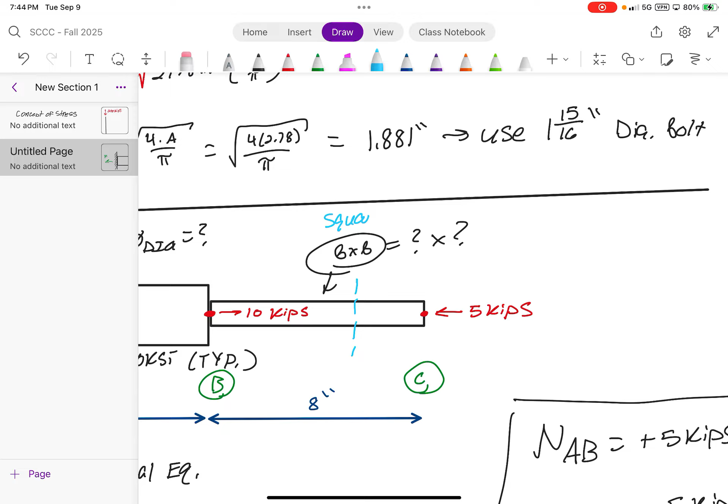Now for BC, I gave you guys dimensions of B times B. What this indicates is it's actually a square. And what do we know about the area of a square? Length times width, right? So this is going to be B times B. So what is the area going to be? B squared, right? B times B, which is equal to B squared. We set that equal to 0.1 inches squared, and so B is just going to be the square root of 0.1. And what we get is that the dimension should be 0.316 inches.

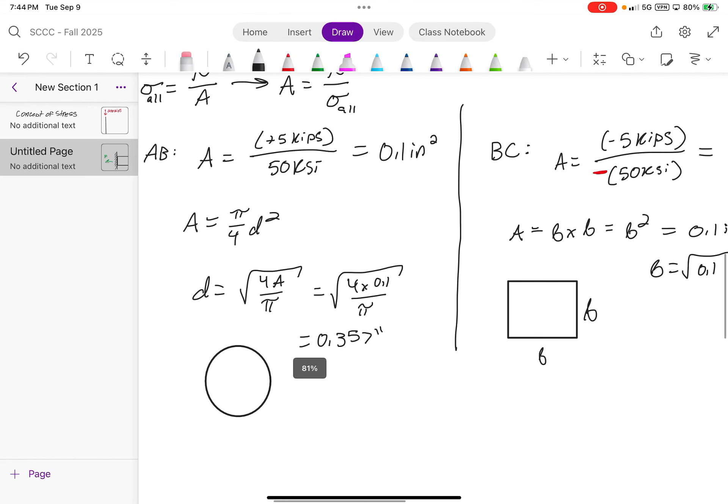Let me just draw a circle here. And those are the dimensions that you would need and how you would size out the members. Make sense to everyone? Are there any questions?

Let everyone finish writing. Class ends at 8:15, so you guys should have half an hour to do these. But once you finish them and feel comfortable with them, you guys can leave. Just try both of them, alright? Just give each one a try. Like I said, don't feel pressured. I'm not grading them. They're more so for me to make sure that I'm teaching properly. And you guys can ask me questions, just like the previous problem. It's just full length problems now for you guys to try.

I also did not generate a solution for these at all, so I'm probably going to do that real quick right now. And you guys can work together too on it. I don't mind, this is just for you guys to, yeah.